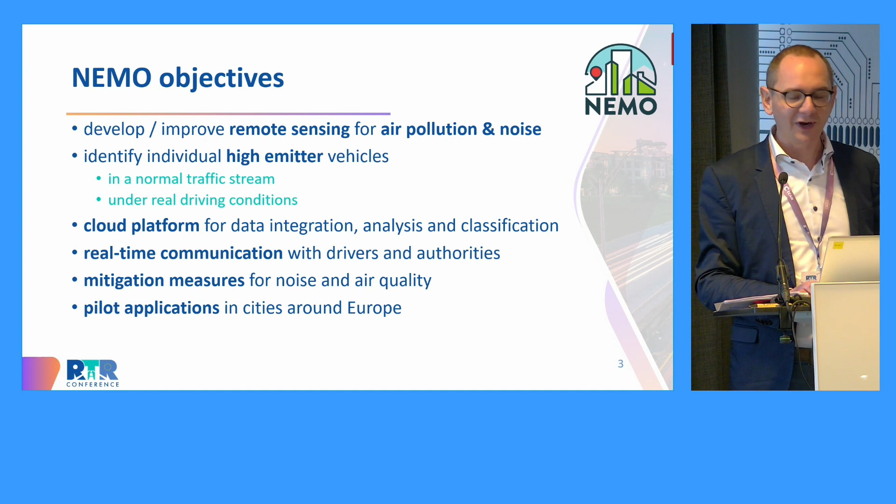And we've been doing pilot applications in several cities around Europe, in Madrid and Barcelona and Florence, in the Netherlands as well, and some testing developments also in, for instance, Rotterdam and Munich, as I will explain later. This is basically what we have been doing, trying to achieve in this NEMO project.

The results presentation, so I will go into some of the results. As we have been doing mainly the noise part in NEMO, I will focus a bit in the next few slides on noise. I do have a slide also on air emissions later. As I was discussing with Professor Pluymers just a while ago, noise is a slightly underrated topic anyway, so I think it's good that we focus on this a bit more specifically, at least for now.

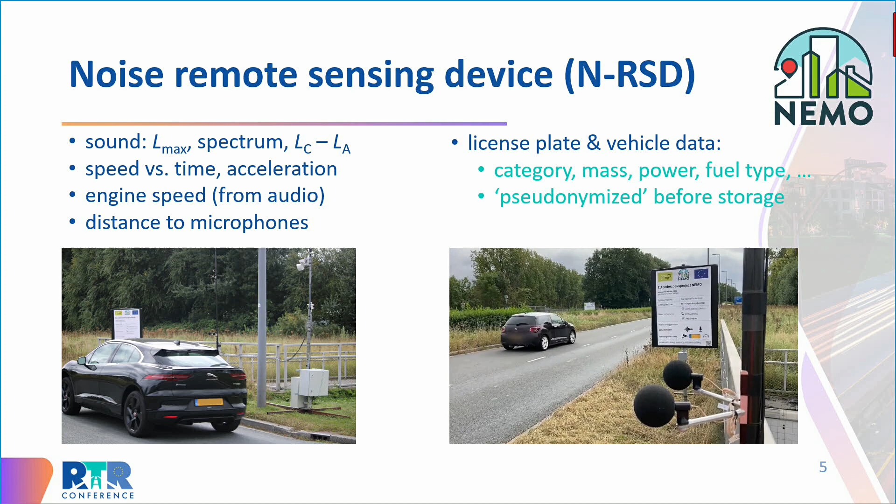So what we have been doing, remote sensing, I think has been around a little longer for air emissions than it has been for noise. So for noise, we've had to start from more or less zero. Our colleagues from Leuven did have an unmanned traffic noise measurement system that they've been using, that we've been developing further in this project.

So what we do is we measure sound, of course, so the maximum sound level during a single pass-by. We measure the sound spectrum. We measure some indicators of low frequency noise, which could be particularly annoying.

But besides noise, we also try to measure indicators for the driving behavior, so the vehicle speed, but also following the speed over a certain time so we can get the vehicle acceleration. As you can imagine, vehicles are much more noisy when they accelerate heavily.

And also we try to measure the engine speed from the audio signal. So if you have a certain frequency tone in the audio spectrum and you know the number of cylinders in the vehicle, then you can calculate the engine speed. That's what we've been trying to do. It's not perfect, I will say, but at least it gave us some information about the vehicles driving in high gear or in high RPM values.

And also we're measuring the distance to the microphones, also from the audio signal actually, which is important at least to know if the vehicle is driving on the left side or the right side of this, in this case, multi-lane road. And then we also got some vehicle data from the license plate.

We're not going for enforcement, and we do not want to know whose vehicle it is. We don't care, at least not for this project. But we're looking for information about the technical information about the vehicle, so the category, the mass, the power, fuel type, etc. And for privacy reasons, we store the license plate only as a pseudonymized, unrecognizable code.

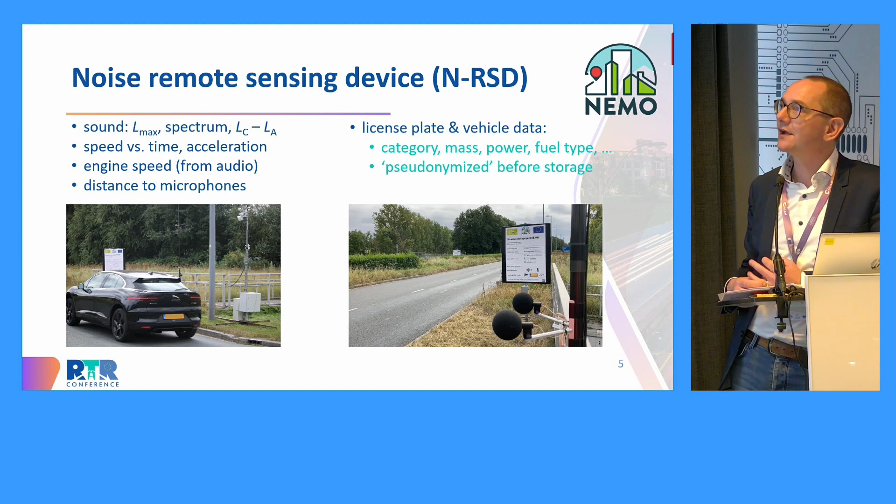So we cannot reverse this back to knowing which vehicle it is, but we do store it as a code so that we can at least see if the same vehicle has already been measured before. So we can combine multiple measurements of the same vehicle on different days and times. So that's what we've been doing. So it's privacy safe.

Well, the location I just showed you is actually one of the development locations we had in Rotterdam. So it's this location.

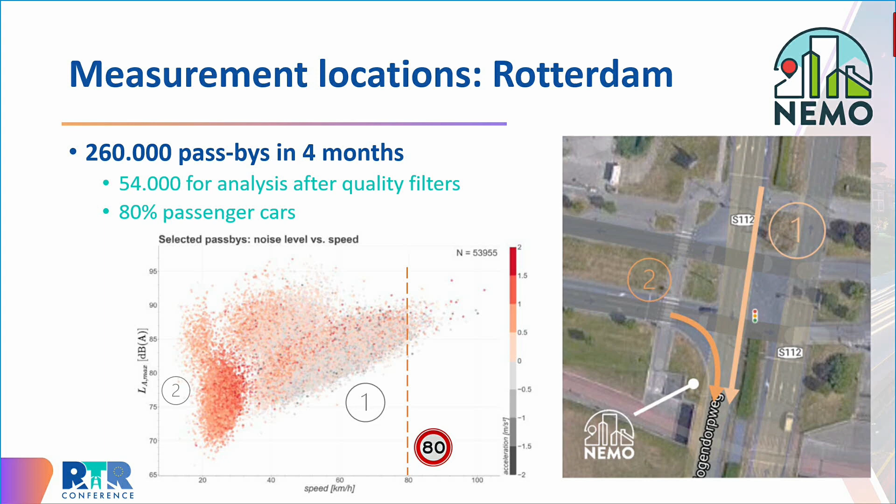It's an 80 km/h road, and we measured some 50 meters beyond the traffic lights. So we had both traffic when the light's green, with traffic at 80 km/h or slightly higher constant speed, but we also had vehicles accelerating when the light turns from red to green. You see that marked with the 2 in the graph on the left, vehicles driving from the side road onto the main road, accelerating slightly heavier at lower speeds. We had some 260,000 pass-bys in 4 months, which is quite a lot.

But if we have a lot of data, we can be quite critical about it, so we did heavy filtering on the quality of the data. Quality is about meteo, for instance - we only had measurements in dry weather and low wind conditions. We had pass-bys only where we have accurate speed and acceleration values, and the signal-to-noise ratio is an important factor. So we got down to 54,000 vehicles after this filtering.

Mainly 80% was passenger cars. Very low amount of motorcycles, unfortunately, which is, I think, what the next presentation will also be about.

In the graph here, you see the noise level, maximum noise level of each vehicle versus the vehicle speed. As you can see, it's not really a speed problem. When people listen to very noisy vehicles, they may say these vehicles are driving so fast in my street. But in this location, it's not a matter of speed - it may be a matter of acceleration. Vehicles may be accelerating heavily and aggressively, but it's not a factor of speed.

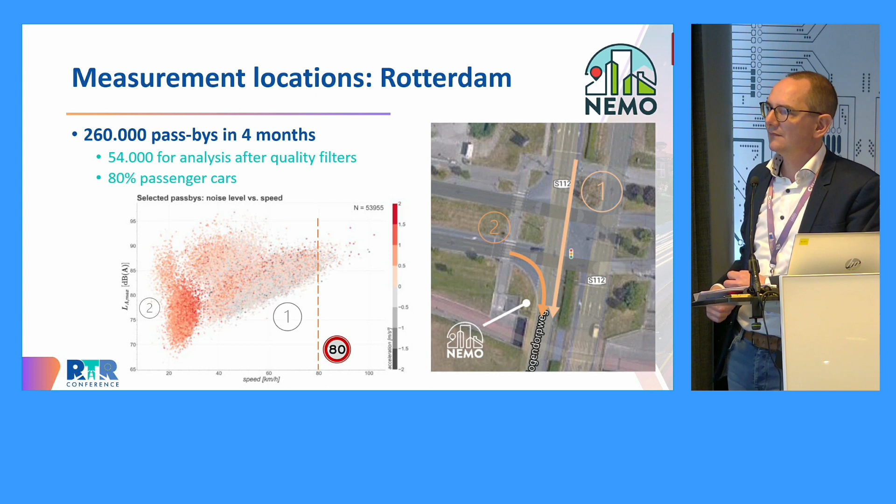Also what you see in this graph is that the top end is more or less a horizontal line - the loudest vehicle at 20 km/h is just as loud as the loudest vehicle at 80 km/h. On the lower end you see a clear upgoing line, which is basically the vehicles that have no engine noise but just rolling noise. From rolling noise, the tire noise, we know it increases with speed, as you see here. But on the top end, with the noisy vehicles, it's not very speed dependent - it's more dependent on acceleration and engine speed. That's already a conclusion from this graph, and I'll get to that later.

So what is a noisy vehicle? Well, you can look at vehicle class, for instance. Of course, trucks make more noise than passenger cars, and motorcycles also make more noise than passenger cars. We know that, and to some extent we are okay with that. So in assessing whether a vehicle is a high noise emitter or not, you can distinguish between different vehicle categories - that's one.

Then you could look at speed. Vehicles that drive faster make more noise, mainly because of the tire noise, as I said. So also at 80 km/h, you see that the difference between the loud vehicles and the not so loud vehicles is much smaller than at lower speeds. So it would be important to consider speed also as a factor in whether we consider vehicles to be noisy.

And then you could look at driving behavior, so acceleration and engine speed mainly, which gives an extra variation of noise levels at the same speed. Whether or not you take this into the equation depends on what you're doing - are we looking at noisy vehicles, or are we looking at noisy drivers? Is it about noisy driving behavior, heavy accelerations, maybe not so talented in shifting gears?

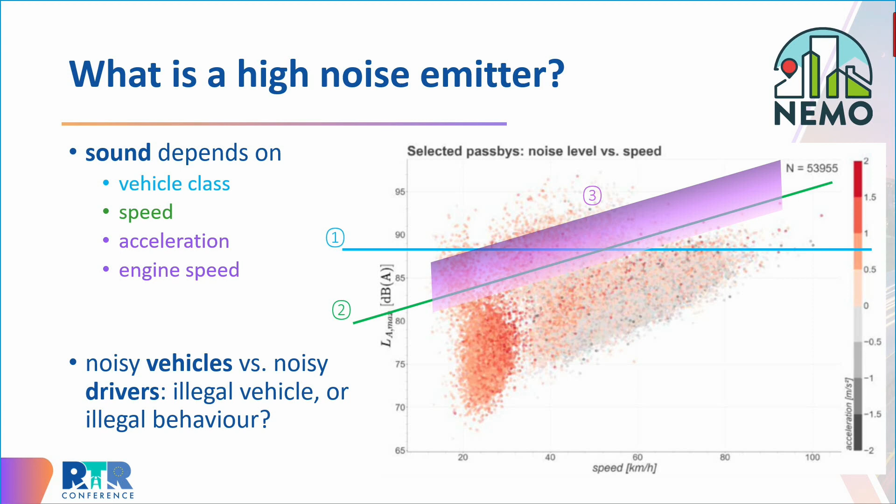Or are we looking at noisy vehicles that have been tampered with - broken exhaust systems, sport exhaust systems, all kinds of systems that could be there. It could be a combination of both. Sports exhaust vehicles are typically driven by people that like to accelerate a bit faster than others, maybe. So I think the very noisy would be a combination of both.

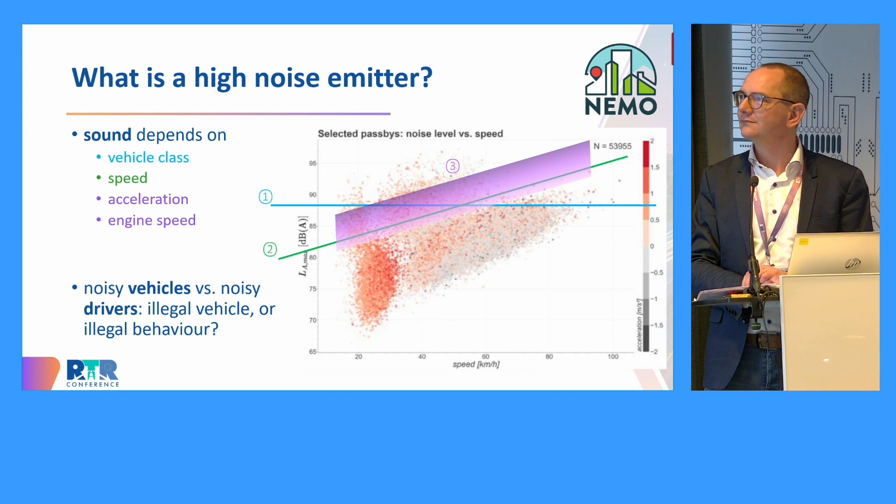So we try to capture this in a classification model, a model that can say which vehicles we consider to be high emitters and which not, or maybe something in between. You could have more categories, but let's focus on high emitter or not. Our ultimate goal was to build an advanced machine learning type of model based on the type approval regulations, so can we prove from the roadside that a vehicle is not compliant with type approval regulations?

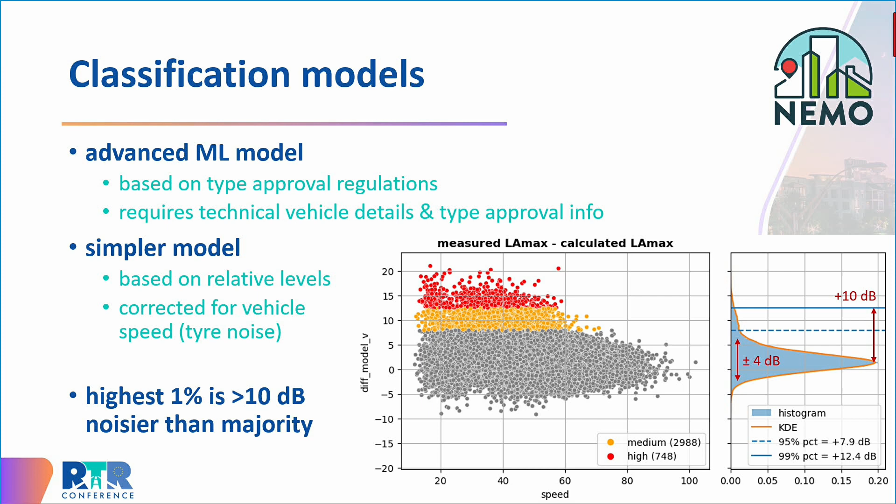To cut it a bit shorter, we've had to conclude that it's really not possible, at least not in a way you can enforce type approval results in a legal sense. We can use type approval to get an idea of what is a reasonably expected noise level for a vehicle, and we can be inspired by the type approval regulations and tests for modeling, but using a single roadside measurement under arbitrary driving conditions is just not enough to prove in a legal sense that the vehicle is not compliant with type approval regulations. That's my conclusion for now, given the current type approval regulations.

What we've also been doing, and also a disadvantage, is that if you want to do it the type approval way, you need technical vehicle information about what type of vehicle, what engine, etc. In the Netherlands we can get this data from the license plate registry database in real time, but it turns out the Netherlands may be the only country where you can do this, so this turned out to be quite a problem for many European countries. Also some of the information we would need is actually not registered in the vehicle registry database, so even if we had access, it's not complete enough.

So a simpler model is based on relative levels, where we're just trying to prove a vehicle is much more noisy than the others, and that's what we've been trying to do in this graph here. We've corrected for vehicle speed, using some statistics and simple machine learning, estimating a reference noise level for a particular vehicle based on its vehicle category and subcategory, fuel type, and also on the driving conditions. So given its current speed and acceleration, what would be a typical noise level for this vehicle at this moment? Then we look at the difference between the actual measured level and the established reference level, so you could say a vehicle is much more noisy than others under similar circumstances. That's basically what you see in this graph.

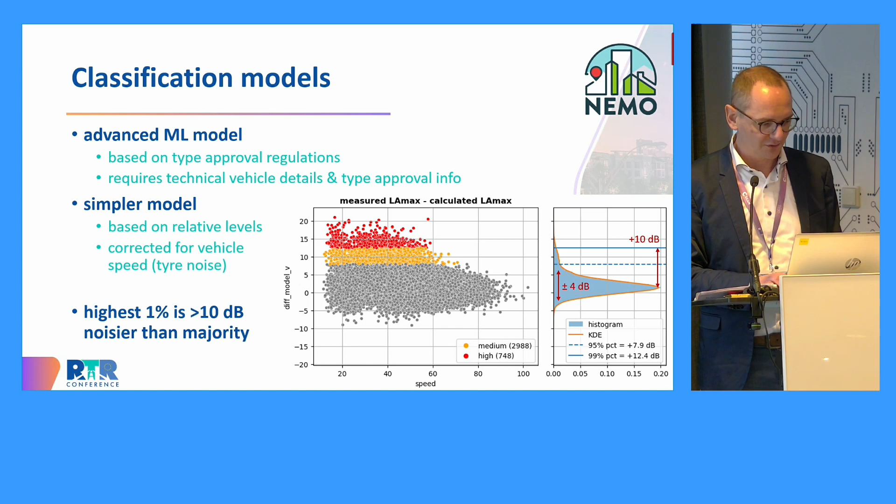Okay, that's the noise. For air emissions remote sensing, I should have put an Opus logo here because I got this slide from them, and if you have specific questions on this, you can always ask me, but I'll at some point refer you to them. What Opus has been doing in this project is developing, validating, and piloting a new prototype of their earlier existing remote sensing devices. As you may know, these remote sensing devices for air emissions use light and laser technology, so they send light through the exhaust plumes of individual vehicles in traffic, and using spectroscopy techniques, they can identify the concentrations of different pollutants in the exhaust plume.

I hadn't heard of this technology four years back. I'm actually fascinated that it's already so advanced, and they've advanced it further in this project. They now have systems that can also work with multi-lane roads, for instance, by doing the measurements from top down rather than from the side of the road. They've patented and tested this equipment, and they're working on standardization, starting in Spain and hopefully expanding to the rest of Europe. They've been checking in this project that the individual high emitters identified from the roadside were

actually also taken back to periodical technical inspections, and they were indeed proven to be non-compliant. So it was a confirmation that the roadside measurements can be verified, at least to some level of accuracy, at say lab measurements.

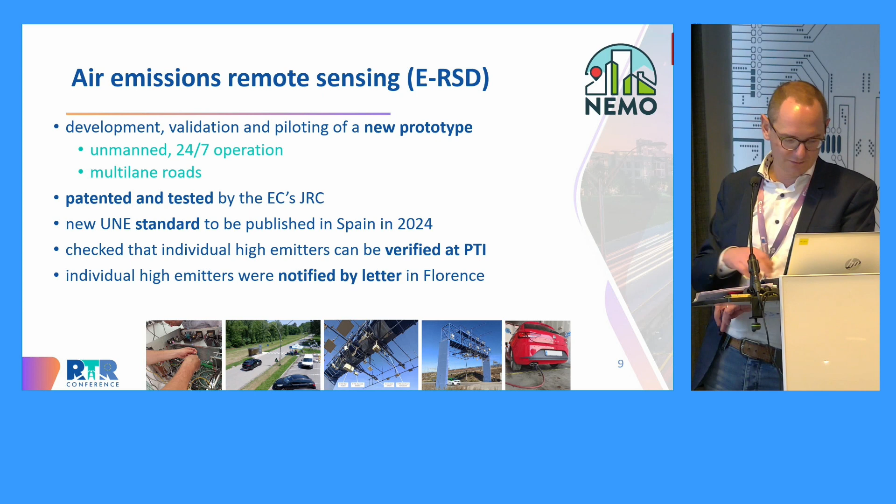Some other project results I unfortunately don't have much time for now. We did successfully integrate everything in a cloud platform able to do this in real time, so we can communicate back to the driver within, say, a few seconds. This could allow for an LED sign on the other side of the road saying 'you're too loud,' which is currently what Amsterdam is experimenting with, but also through an app, emails or letters, as in Florence.

We've also been doing noise remote sensing for rail. For those interested, we would be able to identify noisy wagons within a train, rather than noisy vehicles in the stream of road traffic. So that's also possible.

There has been quite a lot of work on developing new pavements for both urban roads and peri-urban motorways - pavements that are not only low noise but also low rolling resistance, so good for fuel consumption, and able to capture tire road wear in the void content of these roads. If you're interested in pavements, ask me some questions, or my colleague Ronald, who's here in the room. We've had a very interesting conference yesterday with some 200 people online, also organized by Cinea, on pavement. It's a whole topic in itself, but I'll not go into it now.

There were also developments of an urban noise barrier that could stop noise, but also filter particles and NOx in an urban situation. We had some pilots in different cities around Europe.

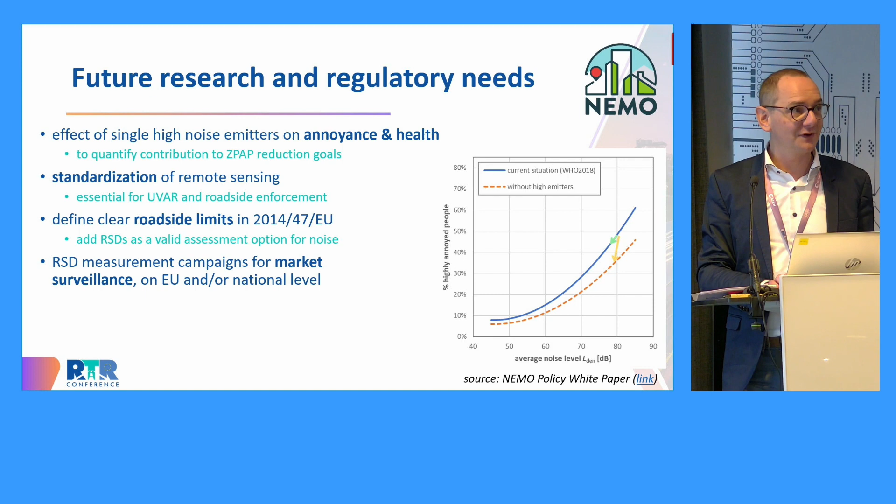We have more recommendations in the white paper if Ms. van der Vries is interested. But thank you for your time. For any questions, you can ask me, or you can visit our NEMO website at any time, today or even in the future. Thank you.

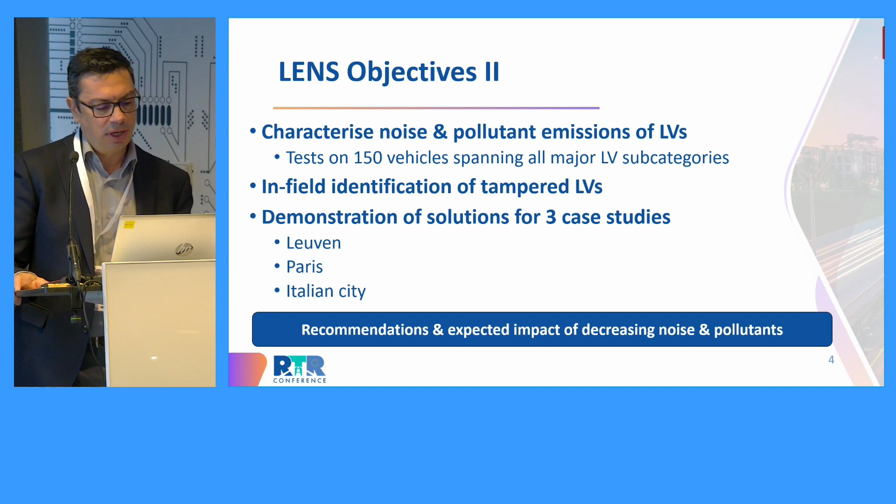We have been looking for Florence. Then we learned that Florence has some kind of local election, and this is blocking some of the measurement that we have. So now my colleagues from IVL are really looking where we should go. There are several options, but we don't want to go away from Italy, because of the large share of motorcycles and the very passionate link between riders and motorcycles in Italy.

Okay, I should focus on results and not on planning. I've told you we are on month 17, but I can already give you some results.

We started the laboratory testing with 2 manufacturers, BMW and KTM, giving motorcycles to the partners that will do the actual testing, what we call a round robin.

In the end, we need to have a database of 150 motorcycles tested in different laboratories, and we need to make sure that the measurements collected in different laboratories are comparable with each other. So basically what we do with a round robin exercise is that we take these 2 motorcycles around the different labs.

We do actual testing in different regulated and unregulated conditions. We compare the results, and we try to make sure that the laboratories measure exactly the same result on the exact vehicles.

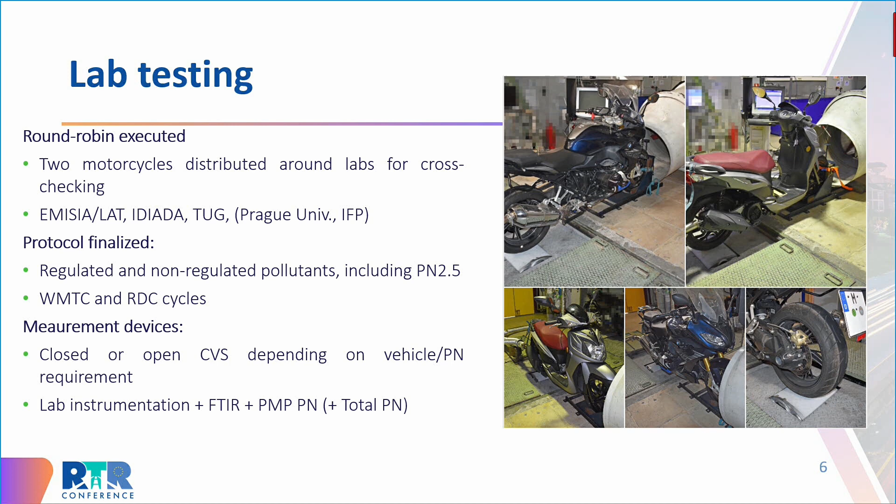The labs that take part in this round robin so far have been EMISIA and LAT, the university laboratory, IDIADA, and TU Graz. Lately, IFP, they have built their own chassis dyno for motorcycles, so they will also be part of the round robin.

And Prague University initially were part of that. We are still working on that, but there are some technical issues, so IFP will most probably be taking over some of the testing at Prague University.

We have finalized the protocol for regulated and non-regulated pollutant testing, including particle number in the lab. I should say here that in the lab there are 2 methods for doing sampling of gaseous pollutants. One is what we call the closed CVS, the other is the open CVS.

Those of you even slightly familiar with exhaust of motorcycles know you can find exhausts of any kind of shape. They can be cylindrical, octagonal, ellipsoid, any kind of shape, and then you have to connect there and take the exhaust out of that.

It's not always straightforward, as you can imagine. We don't have the circular pipes that vehicles have. That's why we are trying to do what we call open CVS, to sample the exhaust from those shapes.

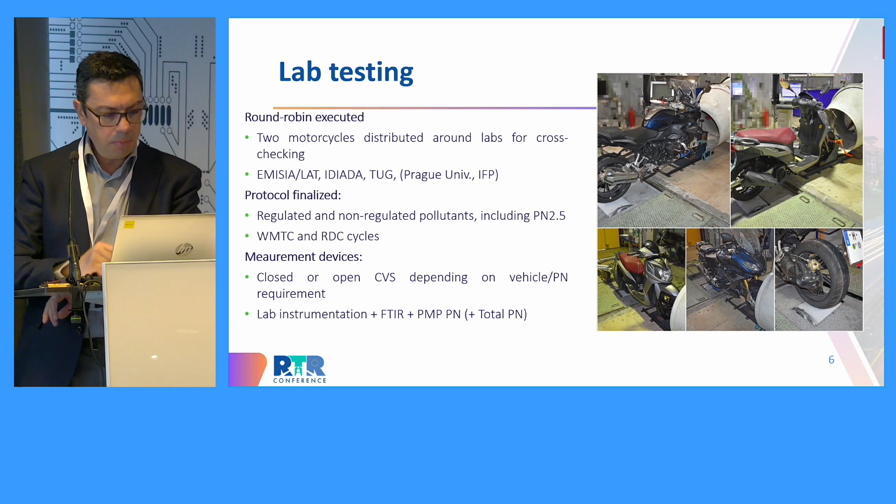And as I've told you, in the lab, we also do FTIR kind of measurements for non-regulated pollutants, PMP particle number, and we also do total particle number going down to 2.5 nanometers.

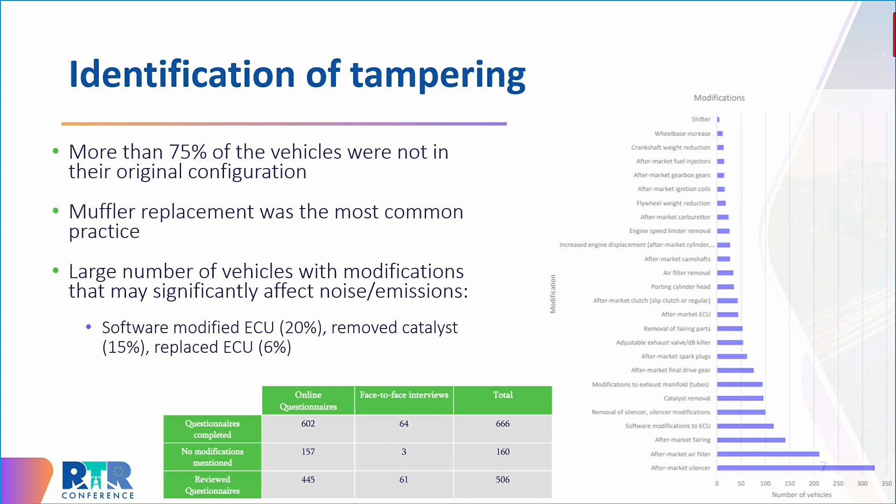Before I go to the on-road testing, I would like to show you where we started. This category specifically, because riders have easy access to the hardware of the vehicle, especially the exhaust, which we call part of the personality of the vehicle, there is a tendency to tamper with those vehicles for a variety of reasons.

So we started this project with a questionnaire between different riders to see to what extent those vehicles are tampered. We circulated 666 questionnaires and also did face-to-face interviews with riders. The people we got hold of mostly had a special relationship with their motorcycle, and we found that 75% had done some kind of tampering with their motorcycle.

You will see, or may not see because the characters are small, the line showing that more than 50% have changed the silencer on the vehicle to an aftermarket silencer.

Sometimes the silencer also has the catalyst in it, so by removing the silencer you might also be removing the catalyst of the vehicle. Then you go to the technical inspection, bring back the original silencer with the catalyst, and the vehicle complies with the test. But then you just take 3 screws out, bring your own non-catalytic silencer or muffler, and that's how the vehicle is used in reality.

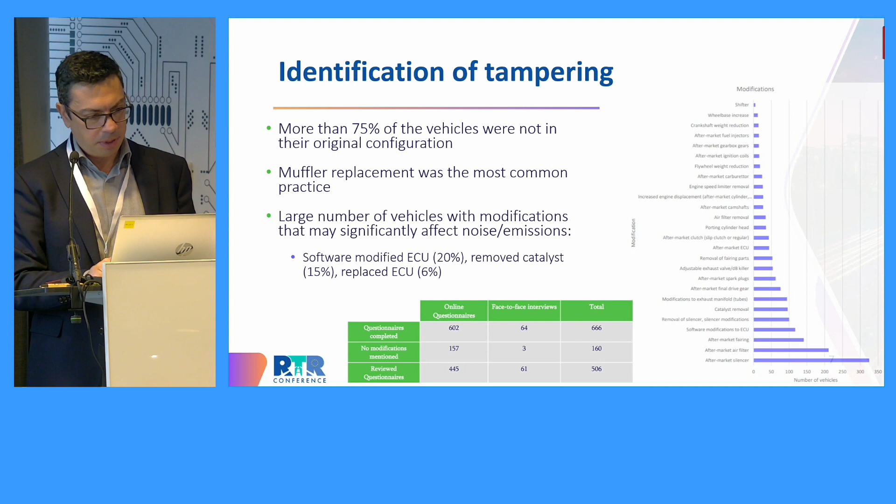And we said we should design both an in-lab testing schedule, but primarily an on-road testing campaign that, as much as possible, will be able to cover all of these events.

Cold engine start, straightforward why. You see transitions from constant speed or acceleration to deceleration phases, because the throttle of these vehicles is very sensitive, so they could produce some high emission events. Some other cases are not very easy to replicate, so driving at maximum rated speed is not always straightforward with super sport motorcycles.

Strong accelerations - how strong those accelerations can be - is difficult. When you have the equipment on the back seats, if there is a back seat on some of these, you cannot go full throttle. So we've said that as much as possible we will try to identify these events and characterize the vehicles, but not everything is straightforward to do.

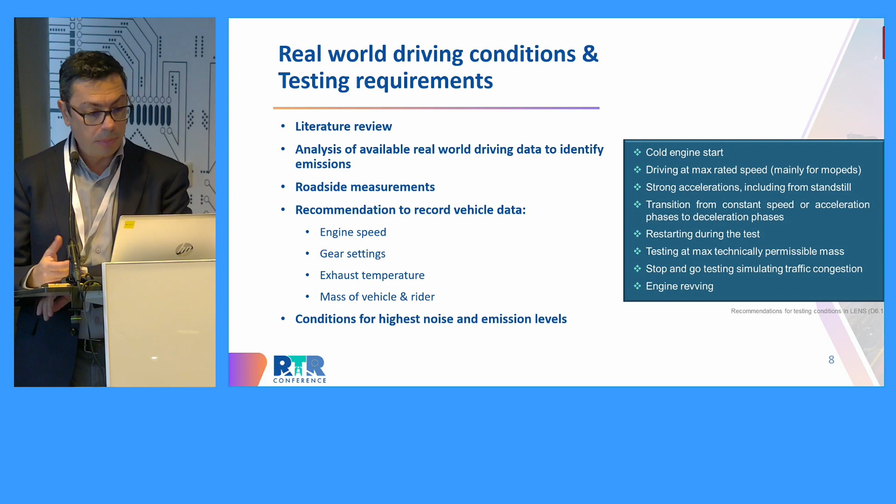So we have to develop a system that will be able to do this as much as possible, but I have to tell you that for some vehicles, very small ones like scooters, we might not be able to do a very thorough recording of all the operation parameters of the vehicle.

A big effort during this first phase of the project was to see what kind of devices we have for on-road measurements. Four partners have developed systems, three partners have developed their own, and one partner uses a commercial system. The only basic commercial system that we can carry on board most motorcycles is offered by company AIP.

It's a compact kind of PEMS system. It can be used for road vehicles, but it can also be used for motorcycles. It's in the order of 25 kilos.

But since not all of us had access to a system like that, we have Horiba in the consortium. Horiba are developing their own SEM system. Then IFP have also been developing their own system. It has been used on passenger cars and is being adapted for motorcycles. And also EMISIA, ourselves, we are developing our own SEM systems.

So when we say SEMs, we mean sensor-based emission measurement systems, basically using either electrochemical sensors and/or NDIR kind of sensors, and some more advanced sensors like the black carbon sensor that we are using in our case. We are able to measure regulated and unregulated pollutants on the road.

Actually, we are the only ones who have started doing on-road testing with our system. This is the advantage of being in the south of Europe. Northern Europe is not very convenient for actual testing in the winter with this non-commercial equipment, but the plan is that by April TU Graz and IFP will also start doing on-road testing using these systems.

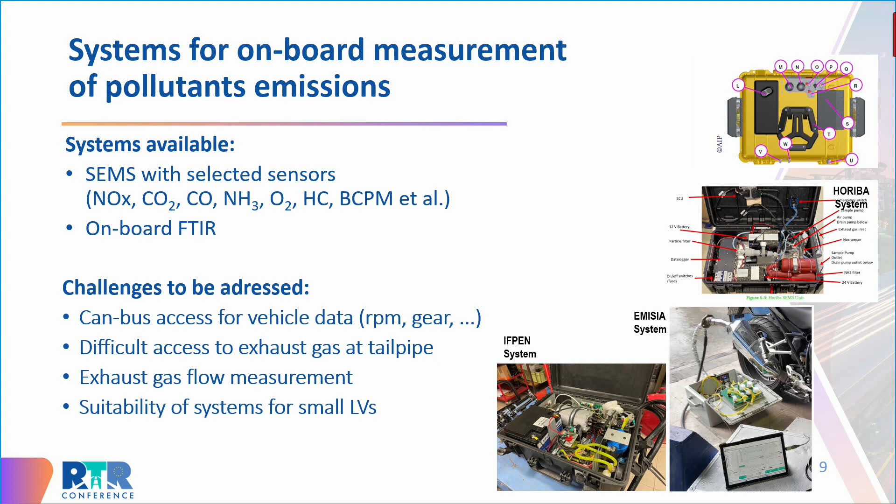But this is how Horizon projects are now. Many challenges, and sometimes the budget drops, so just a message here.

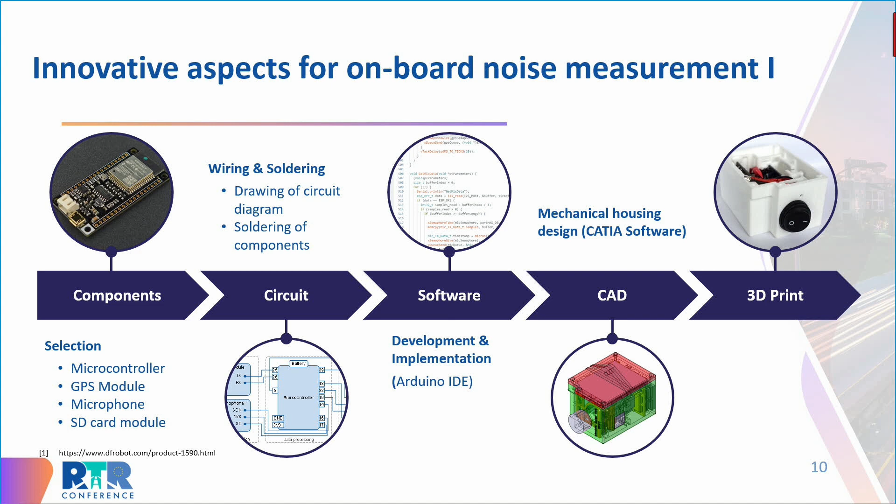Our colleagues at RWTH have developed an onboard noise measurement system. So we are also equipping the vehicles that we do on-road testing with microphones on board. We have identified optimum locations for this, so we're trying to record noise events while the vehicles are driven on the road.

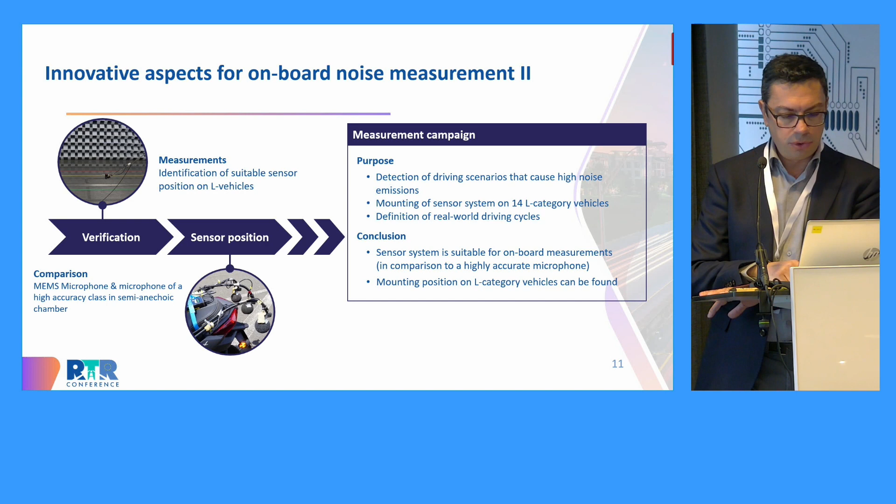Because we would also like to give feedback on how these vehicles perform under the different conditions that I've mentioned before, I guess we need to give some time to discussion, so let me accelerate a little bit.

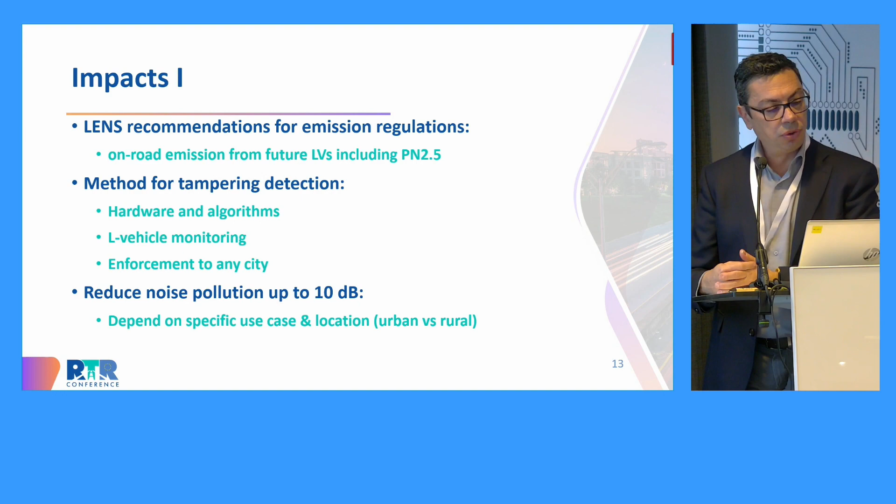In terms of impacts, if this continues to be relevant, we would like to give recommendations for emission regulations going down to particles of 2.5. Through the tests that we do, but also the remote sensing or on-road tests, we would like to provide feedback for tampering methods, as I showed you, but also how we can detect tampering, similar to NEMO.

The fact that we are having collocated noise and emission testing might give us some additional information on how to detect, for example, mufflers that have been removed, because this creates both higher noise and higher pollution.

And we hope that by what we will be giving to the cities in terms of driving patterns, monitoring of emissions, and enforcement of regulations, we will be able to reduce noise pollution by up to 10 dB. Of course, this will depend on the specific use case and location.

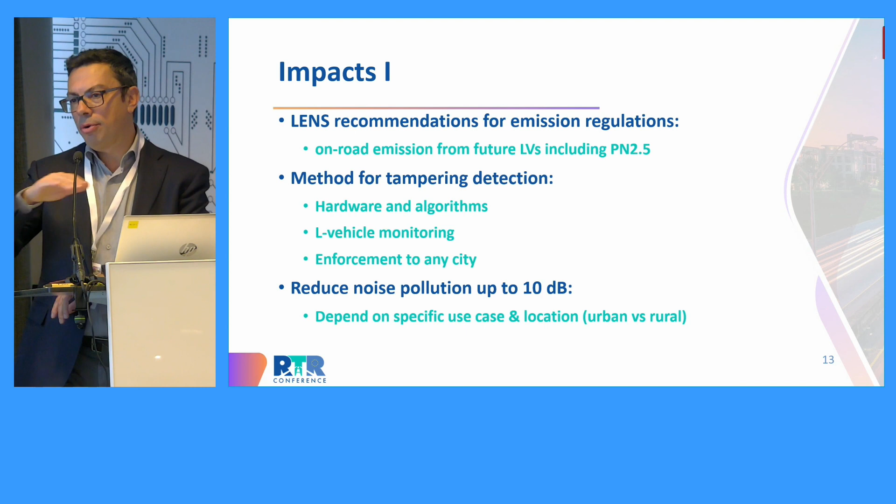And as Bert said before, noise and annoyance are very different things. When we decrease background noise, for example by introducing electric passenger cars, and you have solitary and singular events of high noise pollution from single motorcycles, the annoyance level can be high even though the average noise level is lower. So this is something to take into account in regulations.

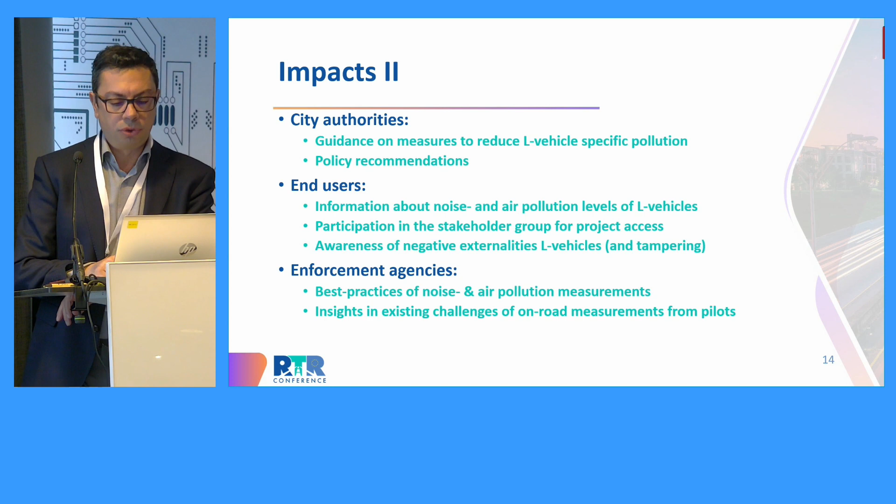For us, the clients of the results are city authorities, obviously, that want to do something with upcoming noise and pollution problems, end users, and we invite stakeholders to our groups, and enforcement agencies. Those could be regulators, but also testing centers and centers that do PTI, if we would like to have more effective control of these tampered vehicles.